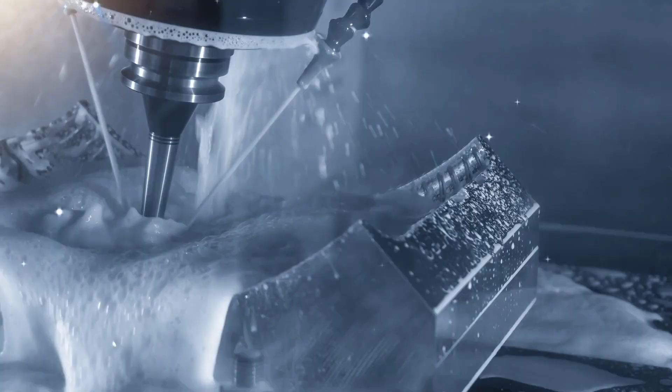I think everyone can recognize the importance of getting an accurate machine simulation in their CAM product, especially for more complicated machines such as 5-axis or Swiss. But because of GibbsCAM's universal kinematic machine, this is actually one of our biggest strengths.

So when you receive your machine simulation from either GibbsCAM or your reseller, it should come in a zip folder or some other kind of compressed package file. However, there are a couple easy steps you need to perform in order to get your machine simulation up and running in GibbsCAM, but it's actually very easy, and I'll show you how in just a couple minutes here.

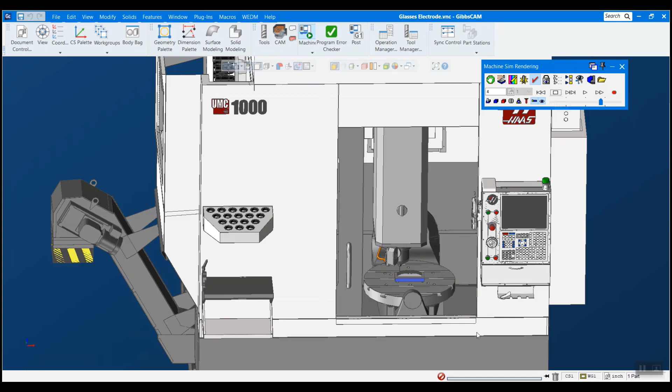So this is an older version of GibbsCAM here that I have my machine in, and I want to get it running in my new version here. So I'm going to stop this, and we're going to switch over to my new version here. And this is just a splash screen. I haven't loaded in a part or anything like that.

I'm going to open up my File Explorer here and just navigate to wherever you saved your package file, your zip file that you got from your reseller. And I'm going to be loading in a Haas UMC 1000 in this case, the same machine you just saw prior. And all I have to do is click and drag this and drop it right onto the GibbsCAM splash screen.

And a post-package extractor comes up here. It's called the post-package extractor because your machine typically comes from the post department and it works with your post to create that simulation. So all of these are actually the individual components of the machine. It's not an assembly. This allows us to move an individual component without moving other pieces. So these are all the different pieces of our machine. You can see there's quite a lot to it.

And you can just go ahead and hit OK. But in this circumstance, I'm going to show you Open Target Location just to show you what it did here. So this is my GibbsCAM install directory. And if I go into my machine sim folder here, we can see that it has taken the Haas UMC 1000 folder and put it in here. And here's all the components that I was just talking about.

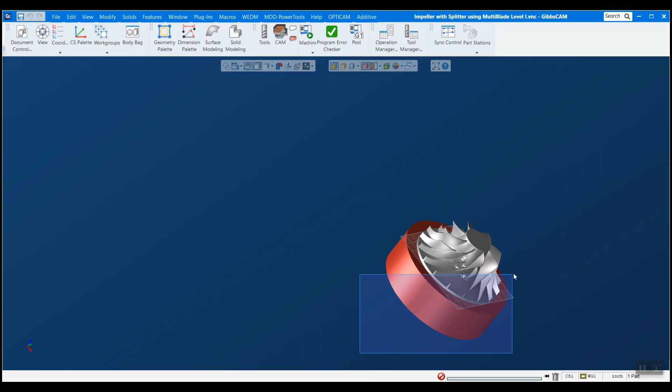I have here a 5-axis impeller that I've previously programmed. And if I open my tools in CAM, you can see that I do indeed have a couple operations here.

So the first step to doing this is we want to go to our document control box here. And this is a list of all my MDDs that I have. And you can see that Haas UMC 1000 is in fact in here. So I'm going to select that as the machine that I'm using. And we have to make sure to match this to our simulation here. So I'll show you how to do that.

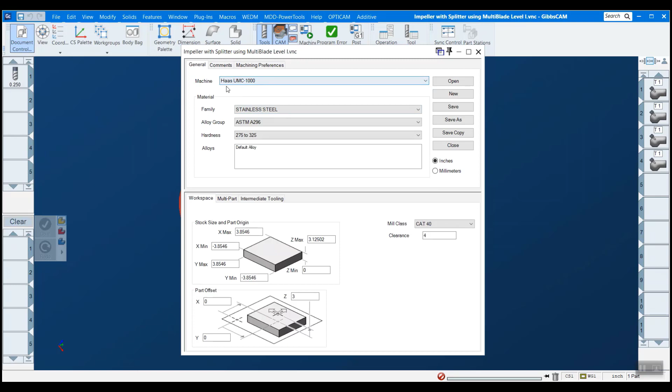I want to use the machine simulation, not OpSim, because machine sim is the one where we can actually render that kind of stuff. And it won't be loaded in by default. What you have to do is go to load machine here, and these are the 4 machines that I have, and I'm going to hit load machine, and it loads it in.

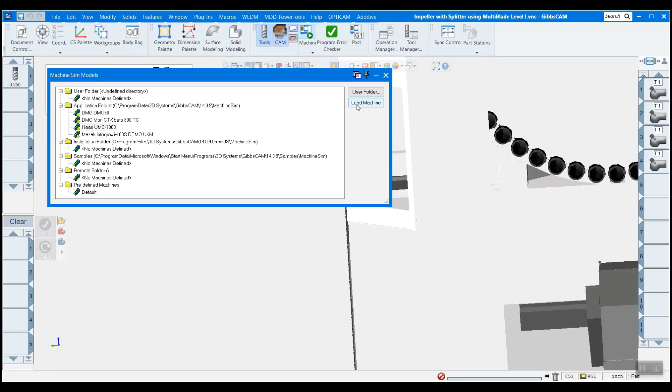It's pretty simple. Might have to rotate, get the right angle to see the front here, but that's our machine. You can see it only took maybe a minute to actually get this in and working.

And there's one more thing I like to do before we actually simulate this. One thing is turn on program error checking, and this will check your program for errors like the name denotes. And then the other thing is collision checking, and you want to make sure that that's on, and that's going to detect throughout the simulation if anything collides with anything else. And it doesn't have to be the stock, it can be fixturing, it could be components of the machine, any solid model that you see here. If 2 things collide, it will let you know.

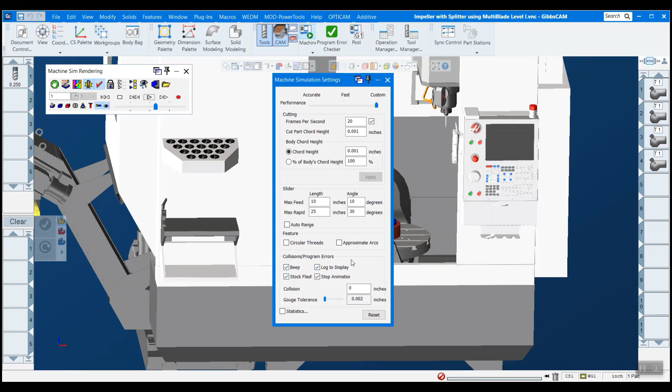And then the last thing we have to do is right click on the bar here and go down to settings, and you can turn these on. I'd like to turn all 4 on, but basically what you're telling this to do is, hey, once I've found a collision, what do you want me to do about it? So I want it to beep, I want the stock to flash, I want to display, and I want you to stop. So now that that's done, we're ready to hit play and see what happens.

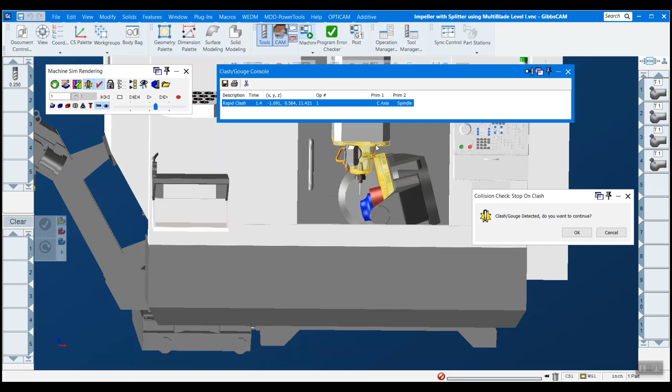And you can see pretty immediately it did indeed find a crash, and it tells you which components are colliding. So we have the C-axis hitting the spindle in op1, and then it gives you the XYZ coordinates of where that collision is happening. And you can see it also turns the two components yellow, and there's a nice little red dot there showing you where these collided.

So as you can see, it only took about 2 minutes to actually get this set up and working with all the settings that I like and that kind of thing.

So it's pretty easy. Ensuring that you have an accurate machine simulation is key to many kinds of advanced machining, as well as protecting the investments that you've made in your machines. In GibbsCAM, it's easy to set up and use your machine using this method.